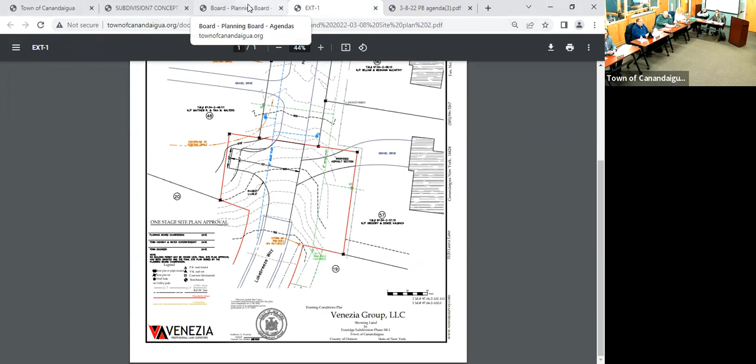Hi. Okay, for the purpose that people have agendas, I'm going to switch around the first 2 items and defer the Venezia Group for Lake Breeze Way for just a couple minutes, and handle Scott Harder, who is representing Ronald and Amy Cerisi, owners of property at a yet to determine address on Middle Cheshire Road. Scott is here this evening with a sketch plan for a subdivision of 28.9 acres into 8 lots, each lot being over an acre. With all that introduction, Scott, why don't you take it from here?

Okay, well, I wanted to thank Rocco for letting me go ahead of him because I have another board appearance right after this one in another town, so this makes it very easy for me to achieve that.

I spoke with the board, it had to be a week or 2 ago at your PRC meeting, and I got some comments from you regarding this concept sketch plan that we've done so far, which is just a simple layout of something the owner would like to do. It takes advantage of the higher ground on the site because the views up there are nice, they're impressive. They allow the owner to have a larger lot, which is what he wants, separate from the other lots that are proposed. The lots are of good size. The driveway can go in and stay within the 10% limit.

I received comments from Lance, I think it was last time, regarding stormwater, which we have not shown any provisions for at this point, but we would certainly do that.

The board also, in the PRC meeting, spoke about common drives and their opinions about common drives. Based on that comment, I wasn't sure if it made a difference to anyone if we provided one of the upper lots, one of the 4 lots for example, to continue the property line, so that it's wholly on the frontage of Middle Cheshire Road. I guess that's kind of an interpretive thing on the part of the board. My experience has been that whether you do something like that or you put in an access, utility, and maintenance easement, you pretty much achieve the same goal. But we're happy to do whatever you would like.

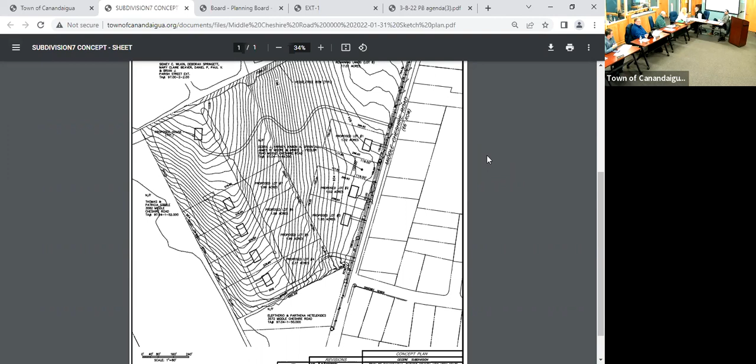I would think that we might. As part of the review, the planning board might consider requiring an easement for a sidewalk along Middle Cheshire, as we've started to incorporate on other projects on some of our main streets. I think that road's on the hit list for complete streets improvements -- you're correct, yeah, it is.

So Scott, we'd probably be looking for a 15-foot easement from the right of way into the property for future sidewalk construction. Okay, all right. And the only other thing I have is...

Assuming the common driveway for the lots stays intact, whatever easement agreements you generate for that -- possibly a draft of those easement agreements should be submitted with your application, so we can get a jump on that and have a better idea of the rights of residences on those new lots, what they're responsible for and obligated to do in terms of maintenance.

Usually in this situation it's just a condition that you have to provide easements for the driveway. Maybe if we have a draft of those easements up front, it'll give the board a better idea, assuring there's protection for the new homeowners to be able to use those lots and driveways.

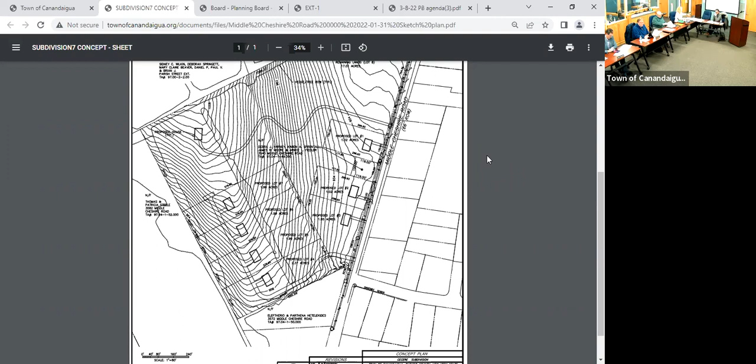Does the board have anything else for Scott? No? Okay, so I guess you'll take these suggestions back, chew on them, and talk to the applicant, and at some point we'll probably be seeing an application from you. Thank you very much for the input, it was very helpful, appreciate it. Okay, have a good night.

Our next application is CPN 22009, the Venezia Group, owners of property at the terminus of Lake Breeze Way, requesting an amended single-stage site plan approval for a reconfiguration of the Fox Ridge Section 5B1 turnaround. Rocco, you want to tell us what the change involves? You're muted, Rocco.

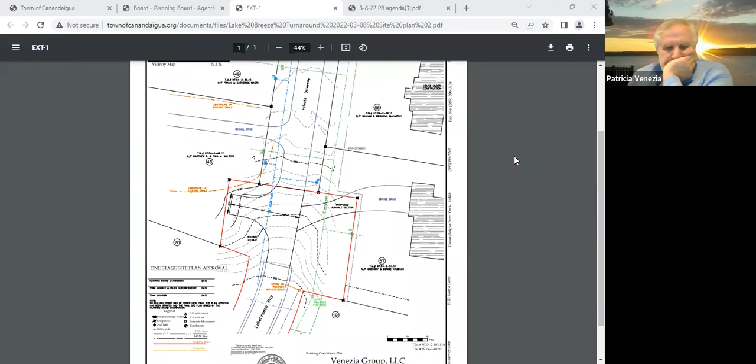Rocco, just as a point of reference, I believe the green is sewer and the blue is storm, but there's a plan showing it coming up here and tying in. That's what we got this afternoon. This plan I'm looking at now doesn't show that.

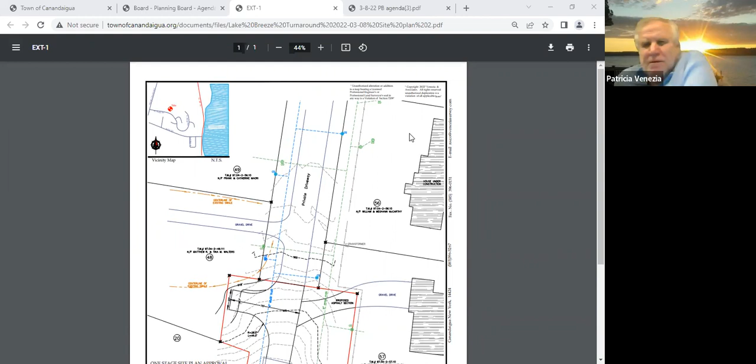I did email the drawings to Shauna and Chris. There's a catch basin on one side, a catch basin on the other side, and it runs down to the existing system. So right now it's not being collected, it's just being conveyed. Now the new system will collect it and bring it away from you, and that'll work, because I've been there when it rains.

Rocco's seen it, we were out there and that water just doesn't drain. I agree, folks, it hasn't worked. That's why we're doing what we're doing, because it hasn't worked, and now we're going to put in something that works. I just wanted to understand it.

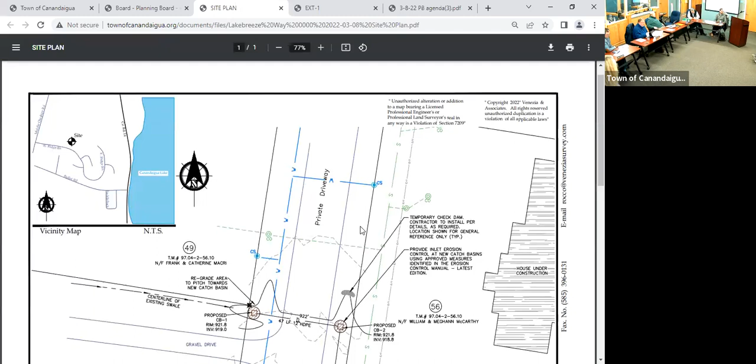There's a drain line, there it is, yeah, that's a storm. That will work. So there's your inlet with a grate, it's gonna catch the flow from the swale here and then the road, so whatever overflow comes back into this one, and this catches flow from this side into the swale and then goes down through the pipe and ties into

the existing catch basin. He's gonna take the manhole off and put a grate down here. Right now, it's coming down Frank's front yard, and that's not gonna happen anymore. Right now it shouldn't happen because you're gonna have an inlet here, a grate, so the water can go into the pipe and be conveyed somewhere. Right now it's all being done over the ground.

The only other thing I want to bring up, and I think Rocco said he's gonna take care of this, is that my natural drainage drains to the street. That's gonna be incorporated. That's the other good thing about this project, he's doing more fine grading along the roadway so we have more conveyance away from the property.

What he's talking about is his basement drains by gravity, and right now it daylights right above the gutter there and runs down the road. When we have cold conditions, it's icing up. So as we go by that, we're gonna connect it into this buried system.

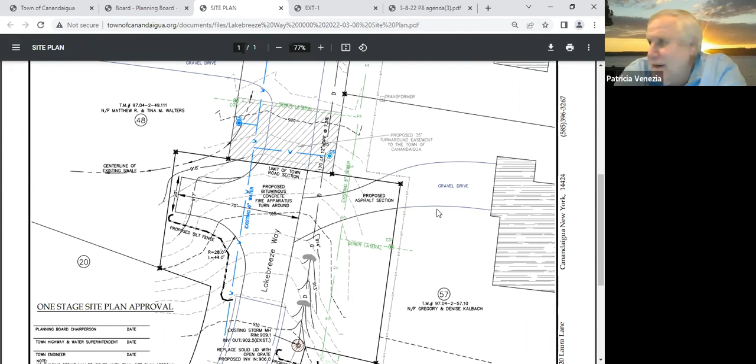Well, I got one more question, and this is to the town. Okay, still good. No, I guess I'm done, thanks Rocco. Okay, up to the podium. Oh, I gotta go to the podium, yeah. Alright, you're on TV. Usually give me a minute, I take three, but that's okay. Give me a minute.

By the way, we're comfortable with the 10 feet going that way. We're just trying to say, does it make sense to come the other way a little bit? So the swale's okay, Rocco builds this, the town owns it. Town's responsible for making it look nice as an entryway into the neighborhood, as opposed to the private drive, because you own the property. It's gonna be dedicated to the town.

So are they responsible, if this is gonna be a high wall here, you guys are gonna take care of that, or? Right now what's proposed is a grass area inside of the right of way. The right of way is the main boundary, right? Yep, around, so everything inside of that area will be dedicated to the town and maintained by the town.

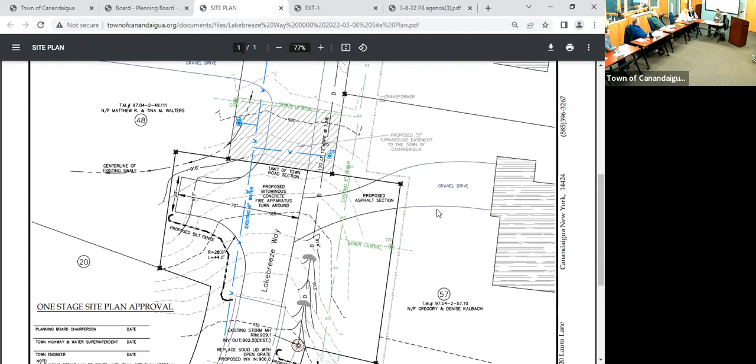One more question now that I see this. This is my driveway - where does my responsibility start and end? Is it here or into the road? You own and maintain the entire driveway. So from here to here? Yep, to the edge of the road.

The town, for maintenance purposes, requires all aprons to be paved that far. Unfortunately yours is all inside that right of way, so the whole thing has to be paved since it's inside it. But it's paved and maintained by you. So from my house to the edge of the street, you would own and maintain the entire driveway, but the only portion that has to be paved for the town's criteria is what's inside that right of way.

I'm not going to do a driveway from here to here. I know. So it's going to go into here, but just so I know for the future, this is town property and they maintain this section. So if the town had to do maintenance on any of the facilities, they would have the right to go do the work, put back the material, clean it up so it looks the way it was, and repave it - since the sewer line has been dug up 4 or 5 times. But if there's damage to the driveway over time done by someone else, not the town, and you wanted to fix it, that would be your responsibility.

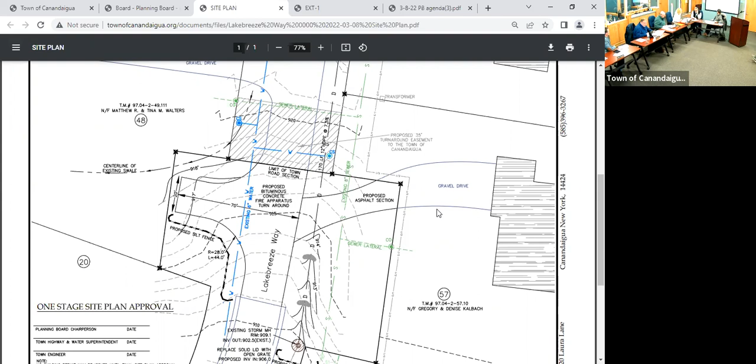Just want to make sure we have the right revision date on the plan - the one we got today. I don't know if it has an actual revision date on it, let's make sure it does. Did you put a revision date on this, Rocco? Yeah, I'm sure they put a revision date - they've actually added some plant pages too. So I'll just say I got March 8th - 3/8/22 at the bottom. 2022 is the plan, yeah.

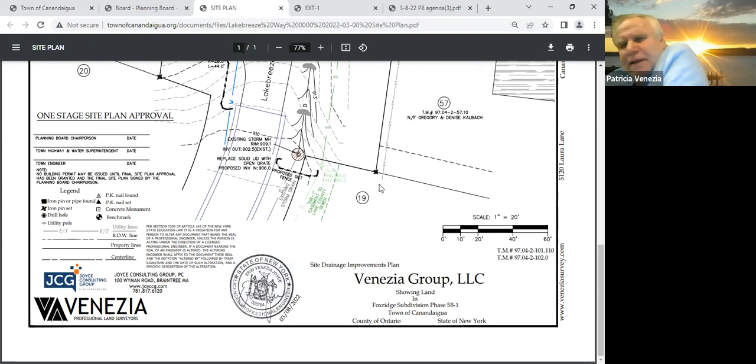With that correction, if Scott accepts that amendment - yes - we will seek a second. I'll second it. Thank you, Mark. Any further discussion? All in favor? Aye. Opposed?

Motion carries. Rocco, is this Fox Ridge for the very last time? Fox Ridge out, signs out. Good night, folks. Thank you, thanks very much, thanks guys for coming out. Appreciate your input, thank you sir.

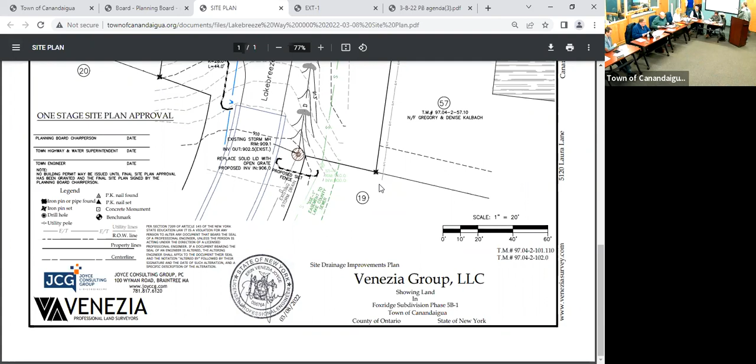Okay, CPN 22007 - we got an email from the applicant saying they're working on some of the architectural renderings required under the form-based code, and they did not submit them, so we are going to defer review of the sketch. I don't think it even requires a motion because it's a sketch.

You're right. So when do we want to defer it to - the 22nd? That agenda is full. I don't think you have to do it this week. Just trying to get an idea of what's happening when - we can move it to the 12th. We need to talk about that date - tell Glenn that the 22nd is too full and we'll do it on the 12th.

We were asked to move the planning board's date from the 12th to the 13th. We'll start with that. You want to talk about that at the end?

Can I have an approval for the minutes of the 22nd? I think we were all here for that. Mark was remote, but he was here. I'll make a motion to approve the minutes that John prepared from February 22nd. I'll second. Motion is seconded, all in favor? Aye.